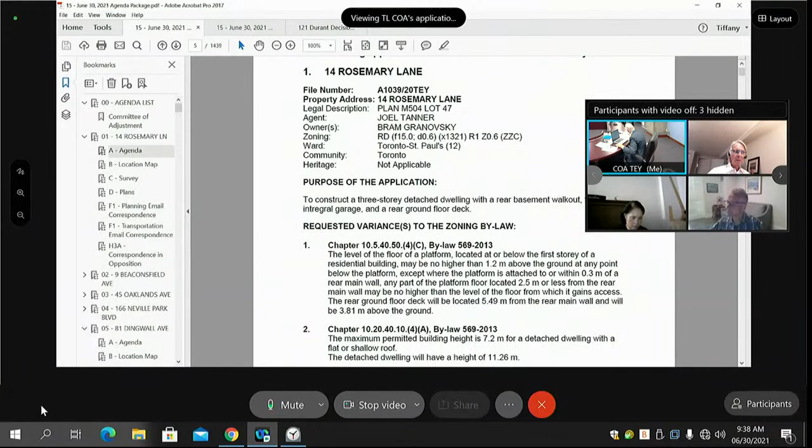14 Rosemary Lane. The purpose of this application is to construct a 3-story detached dwelling with a rear basement, integral garage, and a rear ground floor deck. On this application, we have material submitted by the applicant, email correspondence from planning and parking, transportation services, and correspondence in opposition from 14 Dewborn Avenue.

Mr. Tanner, are you online? Good day, Mr. Chair, members of the committee. Thank you so much. Can we have your name and your address, sir? This is Joel Tanner with the Office of SMPL Design Studio, 15 Colbourne Street, Hamilton, Ontario. So can you tell us what this is about?

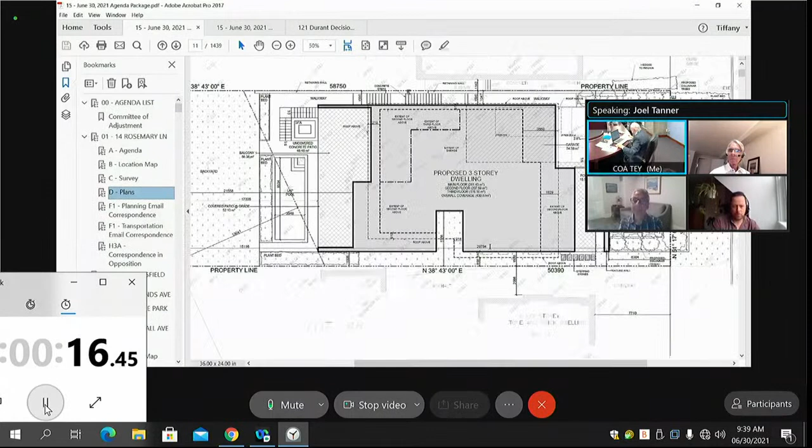Most definitely. So this application is for a single-family dwelling, with the listed variances at hand. We had a pretty good circulation. The current owners of the subject property made their rounds throughout the street to have discussions with neighbors. We have signed letters in support of the application, both at 11 as well as 15 Rosemary. We also have 18 Dewborn, who has signed. The direct neighbors at 12 and 16 gave verbal consent, but nothing in writing.

And as mentioned, the one neighbor contesting the application at 14 Dewborn is on the southern corner, tip corner of the subject property. We do have planning staff support. We feel that the application is minor in nature, driven by the fact that we are designing a modern dwelling. Modern dwellings, as we all know, are subject to deviated regulations from what a sloped roof application construction methodology would entail.

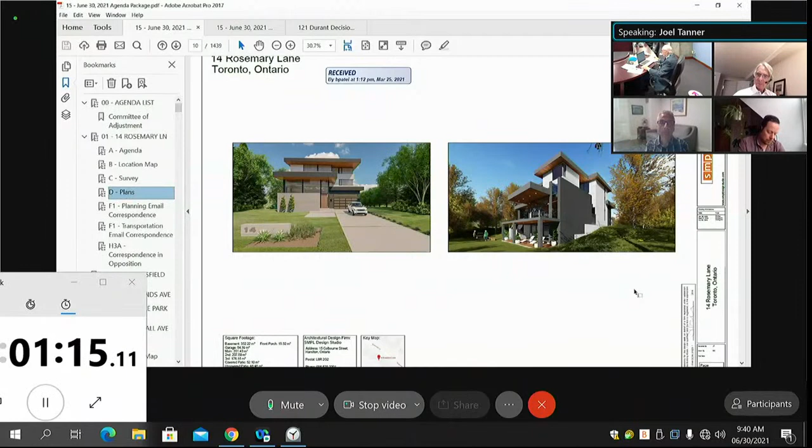That is the real driver in our application for the height deviation. When you look at the numbers from 7.2 to 11.26, that's a fairly substantial deviation. But I want to reinforce that the peak permitted allowable is 11 meters, so we are seeking 0.26 meters above and beyond the peak permitted allowance. I also want to note that we've designed the proposed new 3-story structure to be in keeping with the existing peak roof line of the existing structure on said property, so we are in keeping with the stature and magnitude of dwellings on the streetscape that exists today.

Also, within a peaked roof designed home, you are allowed 3 stories. It is when you get into a flat roof modern design concept where we have to deviate from the bylaw, because we are only allowed 2.

I just want to touch on one last thing within the list of variances with regards to the overall dwelling depth. The dwelling depth is measured depending on the bylaw we're studying - it is either the physical foundational structure of the build, or in the secondary bylaw, it also includes roof overhangs. Within the 569-2013 bylaw, we are allowed 19 meters. The house, as proposed, is 22.7, a 3.71 meter deviation. The rest of that deviation comes into play with the rear balcony. It's very important to us that we've introduced privacy for those direct neighbors, which is driving those deviations.

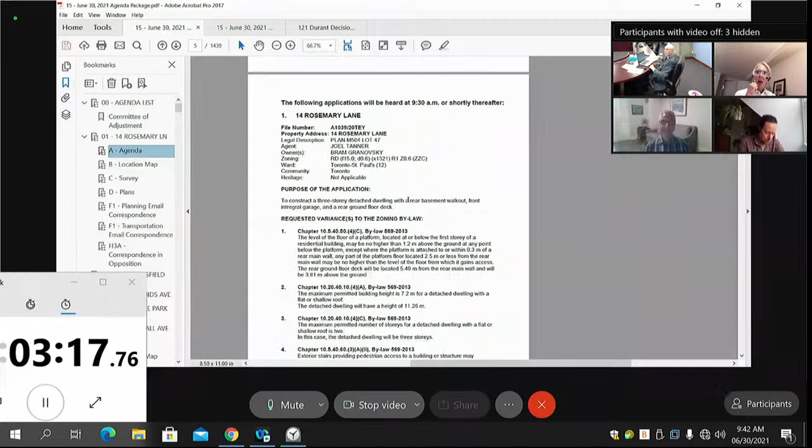Okay. Any questions, panel? Okay, can we move on to Mr. Gold, Mr. or Mrs. Gold?

Hello, Mr. Gold? Hi, Mr. or Mrs. Gold, can you hear us? You may need to be closer to the mic.

Hello? Can you hear me now? Not really. Okay, that's better. But you have an echo. If you're watching YouTube in the background, you have to turn it off. Is there still an echo? No, you seem to be okay now.

Could we have your name and address, please? Yeah, my name is Aoife Gold, and I'm at 14 Dewborn Avenue. Okay, can we have your comments, please?

Well, of the 13 variances, I'm only asking you to change two, the height and the depth. Taking away half of the backyard is major. They want to go to 13 meters from our back, not 24. It's also much higher than it's supposed to be. I don't want someone looking down from a balcony that close to our backyard, making me feel like I'm looking at an apartment building. I think that's what the zoning laws were exactly set up for, situations like this.

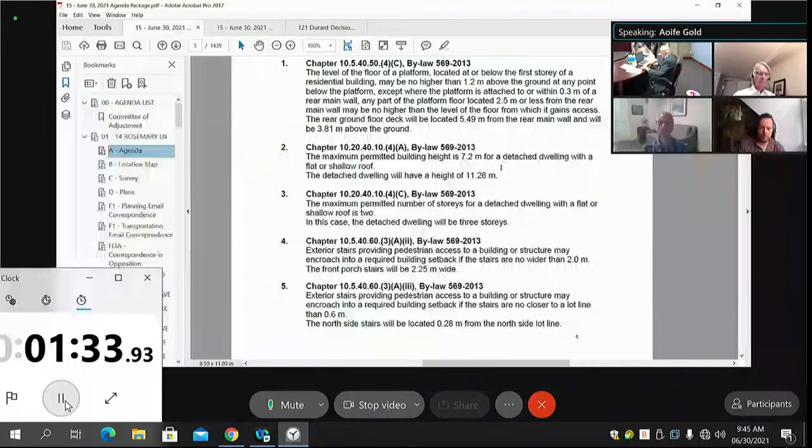Could you point us to the particular variances you're talking about? The height, okay, yeah, I will. Let me just get it. I've never done this before. Number 2, the height, right? My major one is the depth. It's 1.5 times longer than it's supposed to be. I don't call that minor, and they're taking exactly half of what's supposed to be the backyard away.

All right, so I don't know what Mr. Gold, the fellow before me, said. Mr. Gold, which variance is that? That variance would be number 7. Oh wait, let me get the variances, I have to look them up. Chapter 11. I'm just looking for it. 7 and 10 is a depth and a length. Yeah, it's the depth and the length that are my big concern.

All right, so the depth is at maximum, variance number 7. Is that the one you're concerned about? 28.45 meters, that's the one I'm very concerned about. Is there another one with respect to length? Yes, length is number 10. But I just mentioned one. Number 10 is 29.78. Yes, and number 7 is at 28.45, that's 50% more than what's allowed. And number 10 is the building length.

Do you have any other concerns, Mr. Gold? I would accept everything, I just think it's way too long and way too high. I don't want a big building completely covering the backyard right beside me. I think, just to say the last thing, those two proposals are not anywhere near minor, and I'm really concerned. It's half the backyard, it's a few feet or a few meters maybe, but not half the backyard, not 13 meters longer, and not that much higher.

You increased it by another almost 10 meters, 9.45. And I thought that is a big increase, not small.

Yeah, so the overall dwelling depth, item number 7, the permitted depth is 19. We're sitting at 28.45. The actual physical structure of the house is sitting at around 22.7. And when you include the measurement of the rear yard balcony - if you take the rear yard balcony of 3.66 out of the equation - that brings us down closer to about 25 meters, shy of 25 meters, in terms of overall building depth.

And then that 2.7 meter courtyard would bring it down closer to that 22 meters. So it's a bit of a culmination of all elements of the equation, and that's obviously directly linked to item number...

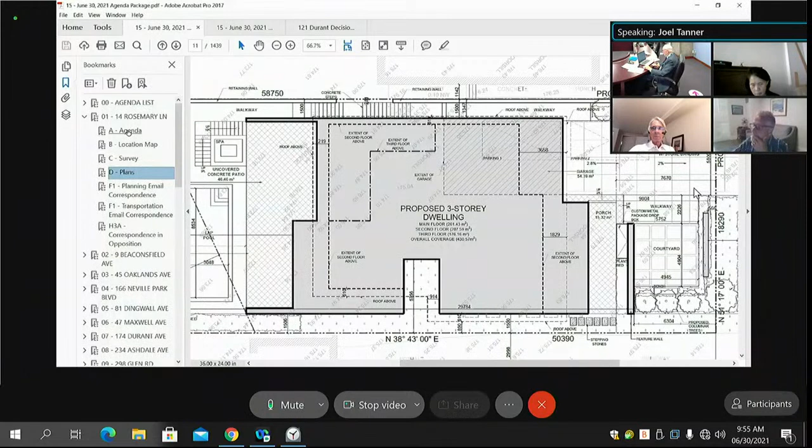Item number 10 - the calculation methodology of 569-2013 in terms of building length is inclusive of roof overhang structures. In a modern dwelling, we tend to design with a larger roof canopy to increase the overall architectural aesthetic of the home, and that's what's driving that overall building length measurement - the roof overhangs in combination with the balcony being covered.

One final item: we have a front feature wall, an architectural concrete feature wall that's 6 or 7 feet tall, shown on the cover page, sitting just in front of the window wall. That's where there's a 3 meter measurement, which is included in the overall length of the building, creating the tolerances: the 3 meter at the front, the 3.66 balcony at the rear, and the 2.75 courtyard in the middle.

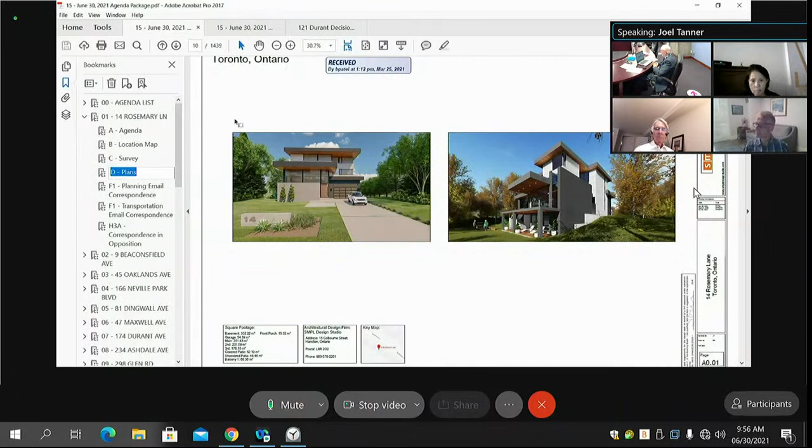One thing that hasn't been mentioned yet, Mr. Tanner, is how does this modern house fit in with the character of the street? I did a Google Street View, and there's no house that looks like this on that street. There's a house currently finishing construction on the opposite side of the street, kitty corner to us, a very clean line modern home that's been under construction for about 3 years, if I'm not mistaken it's number 9. Yeah, I saw that construction. I have no idea what that house will look like.

Very similar in nature and stature and massing to our building, very clean line, modern. Again, I guess we're not here to necessarily examine architectural styling, we're here to examine the variances. We feel that whether it's a flat roof or a slope roof structure, the slope roof is allowed to go up to 11 meters, and we're sitting just over that at 11.26. Modern design aesthetic is happening all over the city, and on this street in particular. We feel it's in accordance with what's happening on the streetscape.

Well, one house doesn't make it in accordance with the streetscape. All right, anyways, any questions, panel? Carl?

Could we look at side elevation 001? Sorry, side elevation 001 - that's how it's labeled on the drawings that were given to us. Yep, so that would be the northerly side.

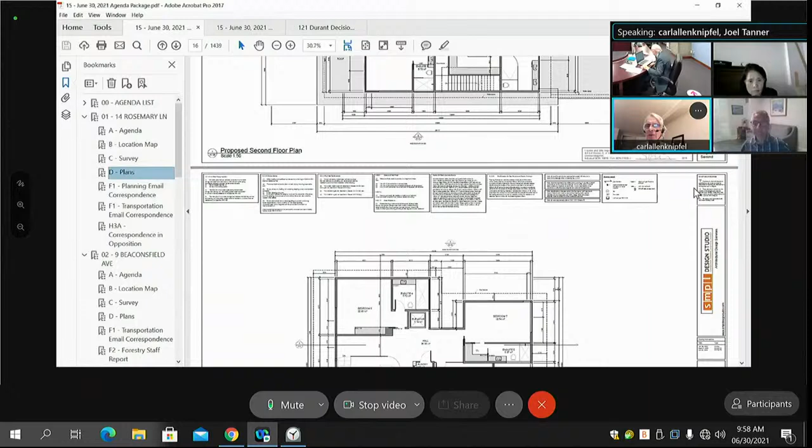Okay, you've been referring to the balcony as if it's a small appendage, but am I correct that the rectilinear space with the window in it, that's the balcony you're referring to? To Mr. Long's point - or Mr. Gold's point, I should say - it is a substantial building, it's not just a balcony. So I'm correct, that's what you're referring to as the balcony, right?

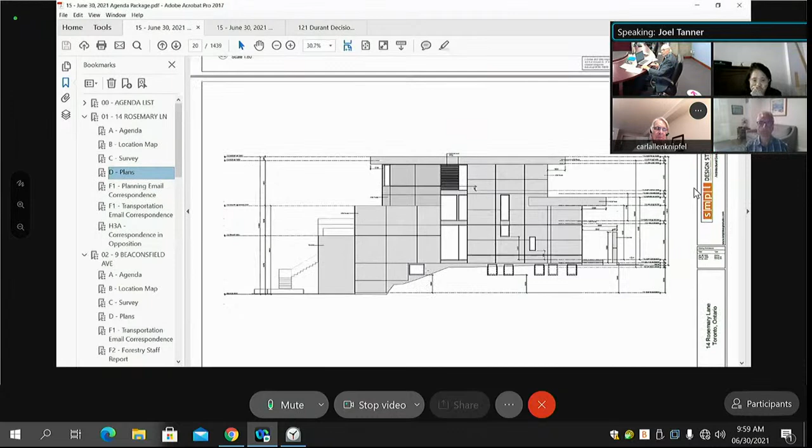Correct. So that projection of 4.585, the 0.457, and the 0.527, that in combination is the northerly side dimensions of that balcony structure. And that's a wing wall we've introduced into the elevation in order to introduce privacy for the direct neighbors, again driven off of that rear yard walkout balcony detail.

We've got, in our honest opinion, some pretty clean step back massing, which you're seeing from floor to floor to floor in order to gradiate that height. We're not looking to build a straight 3 or 4 story box. We've introduced some pretty strong architectural linear elements, and we've stepped back the building profile on both the front and rear elevation of the home to mitigate the impact on the overall streetscape as much as possible based on the magnitude of the development.

Okay, thank you. All right, panel, any further questions? Okay, we can now go into committee. Any comments?

Yes, Carl? Mr. Chairman, I think in isolation this is a very handsome building. It's extremely, as the applicant has said, extremely clean, and I think it's quite engaging. My problem is with it in this particular location, which is what we are charged with looking at - does it in fact enhance the location, or does it create problems for the neighbors or the neighborhood?

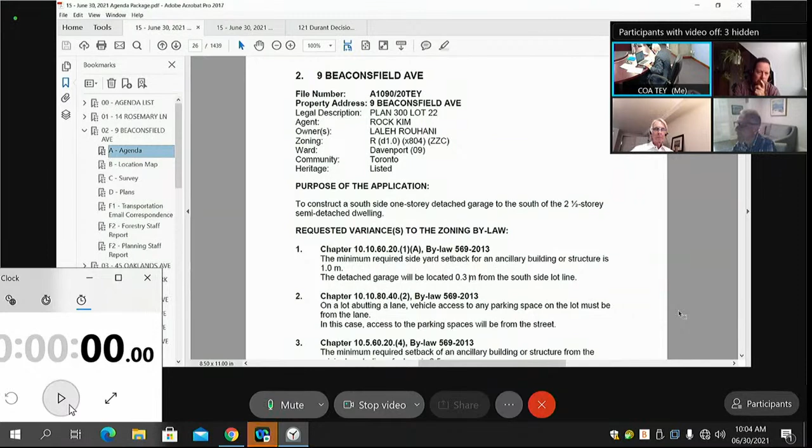Number 2, number 9, Beaconsfield. Purpose of this application is to construct a south side one-story detached garage to the south of the 2.5-story semi-detached dwelling. With this application, we have material submitted by the applicant, correspondence from traffic, transportation, and a report from planning and urban forestry.

Mr. Kim? Hi, my name is Rock Kim, yes, I'm on behalf of the owners, I'm the applicant. Actually, we already sent the email that the owner doesn't want to go forward with this committee, so we want to withdraw it. Are you asking for deferral, or are you asking to withdraw your application? Withdraw our application, yes, withdraw.

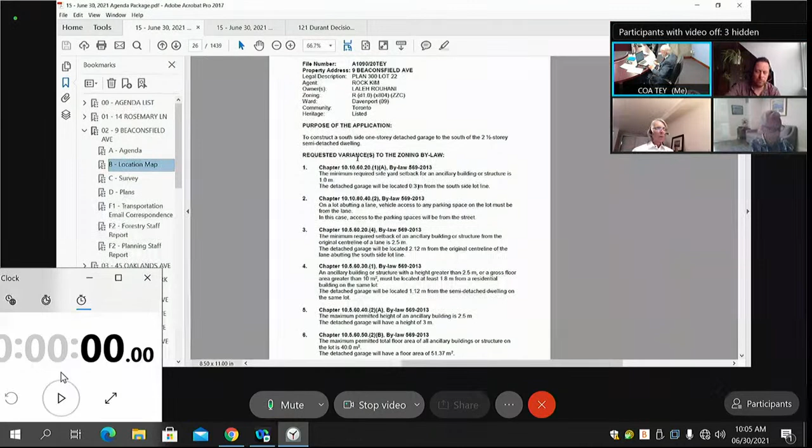Okay. Thank you, so we have some opposition. Ms. Frankel? Hello, can you hear me? Yes, we can. Did you hear Mr. Kim say that the owners want to withdraw their application? No, I didn't hear that. Was that just said just now? Yes, just now. So they're withdrawing their application for the variance, right? They're withdrawing their application, yes. Well, I'm in favor of that withdrawal.

I thought the application was misconceived, I thought it was intrusive architecturally and conceptually, so I think it's wise to withdraw it. All right, thank you, Ms. Frankel, I don't want to discuss the merits. Can we just get her address for the record? My address is 1088 Queen Street West, corner of Dovercourt. Thank you, all right.

Panel, do we have a motion with respect to withdrawal? Yes, Nimrod? Yeah, I'd move approval of the request to withdraw the application. All right, a seconder? And do we have to close the file on that then? Yeah, the motion will be to close the file. Peter, second. All right, all in favor of the withdrawal of the application and closing the file? All right, you have your request, Mr. Kim. The withdrawal is approved and the file is now closed. Thank you very much.

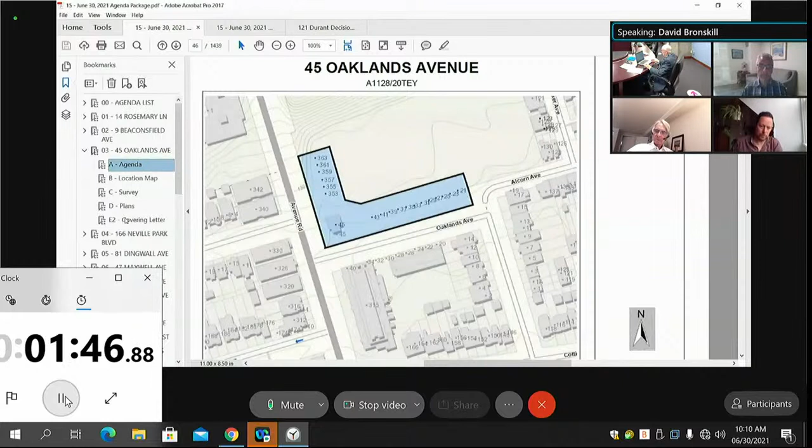Without this provision, in my respectful submissions, there would be potential issues such as stormwater management if the first floors of the buildings were actually below the elevation grade of the adjacent sidewalk. What's important for the committee is this is not a case of construction occurring in a manner that wasn't in accordance with what was previously approved. It's an error in the actual site-specific bylaw itself that we are correcting through this variance process. In short, the semi-detached dwellings as proposed, approved, and ultimately constructed are the same. It's just that this variance was not previously accounted for in the site-specific zoning.

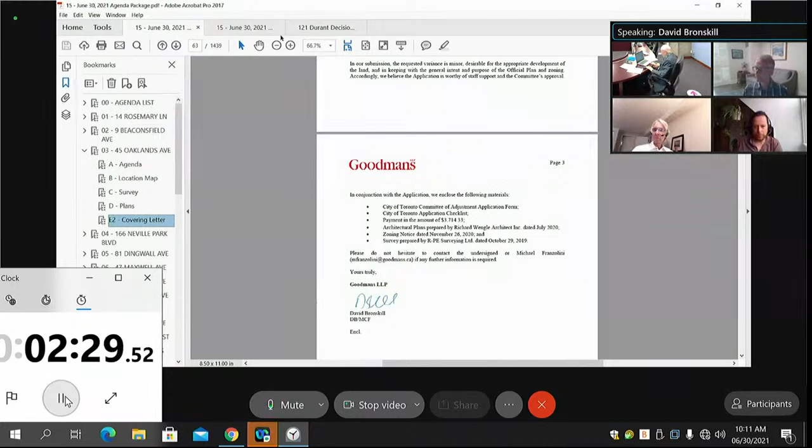I'm happy to answer any questions of clarification the committee may have. Panel, any questions?

All right, thank you. We'll go into committee now. We have a... Carl?

Mr. Chairman, I think this is a very straightforward application, and as Mr. Bronskill so clearly indicated, it appears very much a technical amendment. Clearly it makes sense to have the living quarters above the grade of the sidewalk. That was intended from the original design, and it was intended as well when the draft site-specific bylaw was created, it was just missed. So I have no difficulty at all in supporting this application without conditions, and I would so move.

All right, do we have a seconder? Yim, all in favor? You have your approval, sir. Thank you.

Number 4, 166 Neville Park Boulevard. The purpose of the application is to construct a 4-story detached house with an integral garage and front porch.

I need 2 mics. Oh, this one isn't so good? Oh, okay, all right.

And with this application we have material submitted by the applicant, email correspondence from Urban Forestry and Transportation Services, a report from the Conservation Authority and Urban Forestry, and opposition from 153 and 161 Neville Park Boulevard. Mr. Librach?

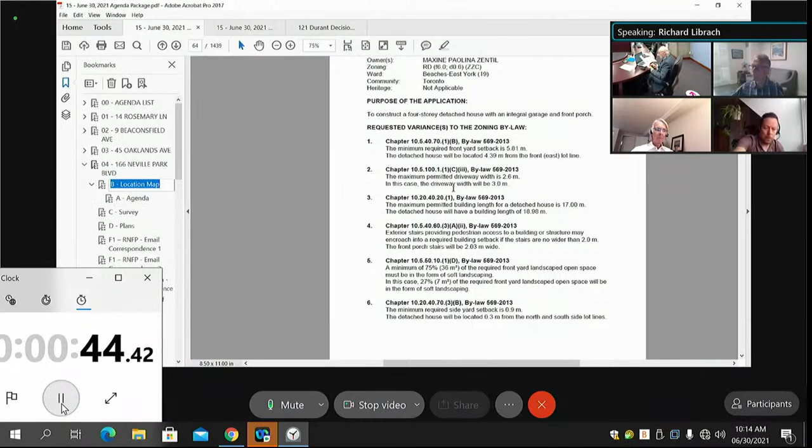You start moving up the street and you'll see house entrances located 3 stories above the street. On the other side of the street, you might see a 2-story house located a story above the street because of the geography. The essential design strategy for this proposal is a 2-story base home with a setback 3rd story over the garage level, similar to what's there today.

The strategy is thought to be in line with many examples of recent developments on the street, in particular the house immediately to the north that exists there today. The street front of the house is located midway between the house to the south and the north, so it's been relocated, moved a little bit further forward from where the house to be demolished is, and so on and so forth.

Much effort was spent working with the planning department, and they weren't going to be satisfied until the other authorities were satisfied. As such, there is no planning report that we're aware of that shows any objection to the proposal.

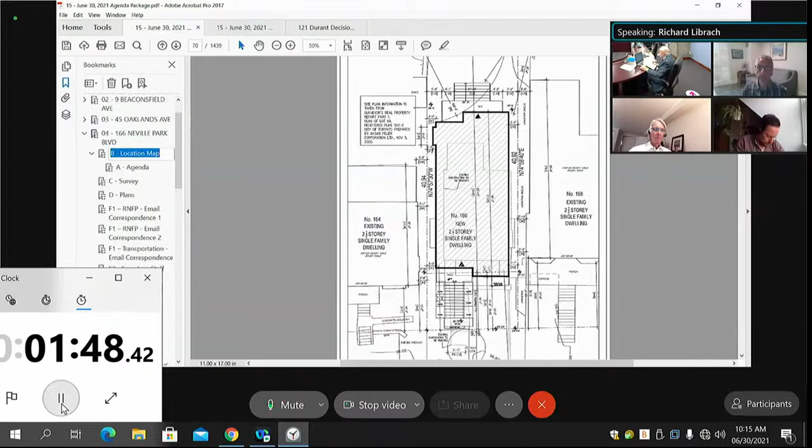In working with the various authorities, we have correspondence from the TRCA dated March 22nd showing no objection to the proposal through design changes made with them. Ravine and Natural Features Protection from Dan Hammerschlag on Feb 19, also no objection. Urban Forestry and Ravines, also no objection, that's Yuroslav. Finally, we conducted a Zoom meeting with the immediate neighbors on March 11 to describe the proposal and answer any questions.

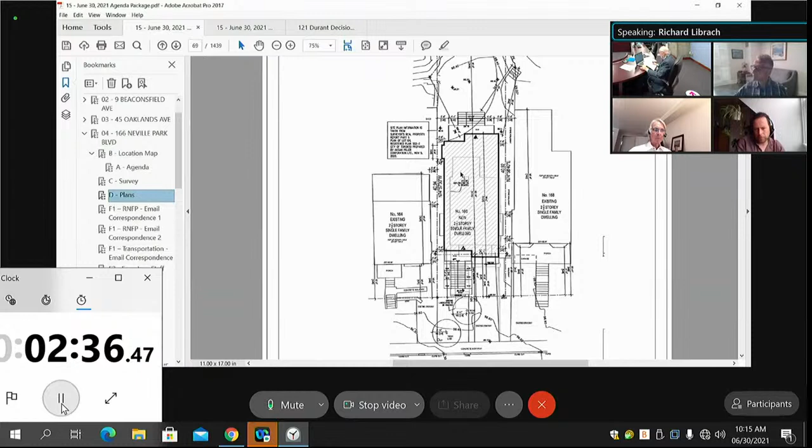At the time, their concerns were primarily water-based, because of the geography and the convergence of the water flow. The land this house is proposed on will need significant water abatement addressed. It's not part of this committee of adjustment hearing, but we're aware we'll need underground water devices to carry water to the street. We're also aware there were letters of objection from a couple of neighbors on the other side and down the street.

I'd like to address the concerns of our neighbors immediately to the north and south who came in yesterday to the committee. Their concern was expressed again about water and also the side yard setbacks. I want to say this before any questions are put forward, which I'd be happy to address regarding any of the variances.

We no longer require variance 4 or variance 6, and variance 6 addresses the side yard setback. We are going to remain at the permitted setback of 0.9 and no longer require that setback. That was really for bay windows located on the second floor, which had nothing to do with water or access to the rear, but we decided to remove that variance. So we no longer require 4 and 6.

If the committee would like to ask any particular questions about the variances, I'm pleased to answer them. Just one thing that probably stands out: the proposal is not a 4-story house, but it is technically defined that way because of the location of the first floor being at the garage level. So the gross floor area proposed in the basement is included and magnifies the density number as well. But it is a 3-story house over the garage level at grade.

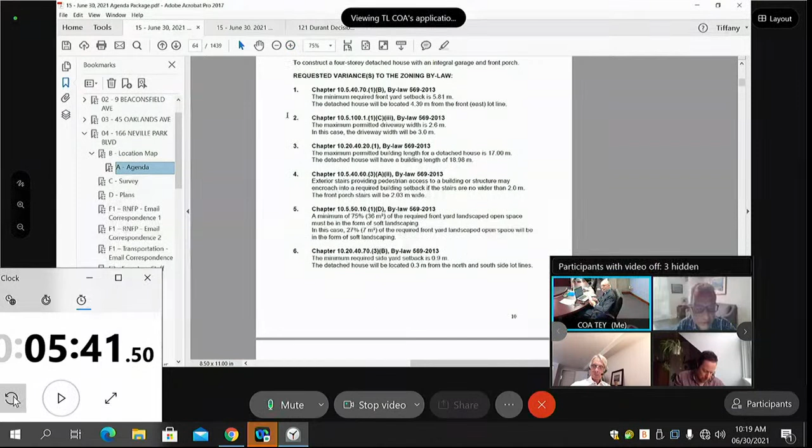The first is, can the applicant explain what is on the roof of the building? Yeah, of course. The design of the roof is really a clerestory window. It's not a habitable space. The height of the proposal is measured to the top of the roof of that clerestory window. The window feature itself is not visible from the sides or the street whatsoever. The actual height of the top of the roof is 11.31 meters.

That's 109.7 geodetic. The neighbor to the north is currently at 109.6 geodetic. So the top of the roof, not the feature you see above it, which is centered and set back - the side elevation would describe its position relative to the front elevation - it's really not a visible element, but it is a clerestory window facing to the back.

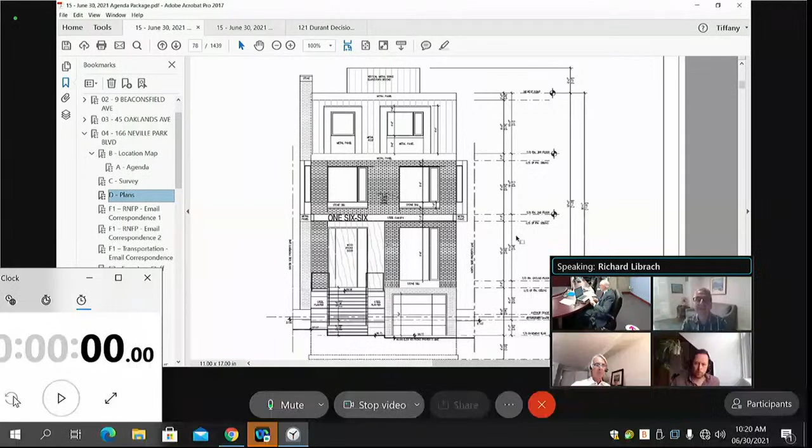And so why does it have to be that high? Could it be lower and still covered in, I'm assuming it's glass to let light come through? It could be. The idea here is to use a window rather than a skylight. Could the technician please move the drawings down to the side elevation?

Hold on, that's the back. If you wouldn't mind just stopping there for a moment. So you can see there is a window facing the ravine. It's not a view, it's to bring natural light in through a window, not a skylight. And it's very shaded back there, there's a lot of trees. The ravine goes up, it's a reverse ravine, so it's quite shaded all in that backyard, but you would not get direct sun through that clerestory.

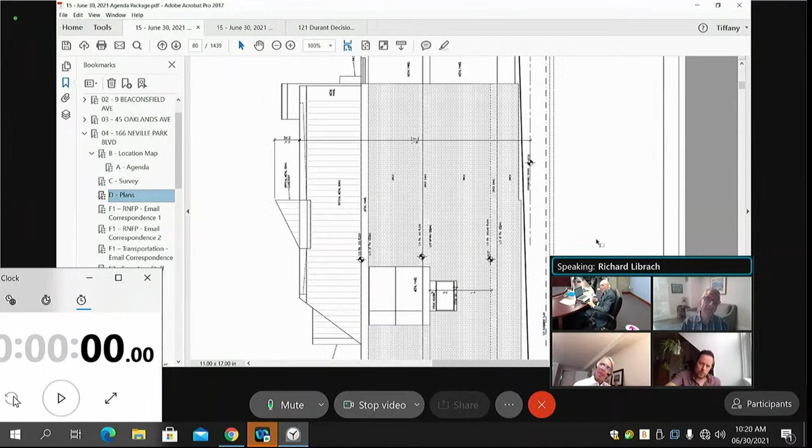If you move to the side elevations, please. Although it's sideways here, I don't know if you can turn the drawing, but you can see how far back it is set from the front and rear elevations. So it is not something that you can see whatsoever.

However, the zoning approach here measures to the top of that element. In fact, the top of the roof is at 11 meters, where you have the top of the third floor.

Great, thank you. And the other two questions, one related to the FSI, if you can just explain what is triggering such a large increase. And yes, then absolutely. The other question relates to the soft landscaping in the front yard. Yeah, absolutely.

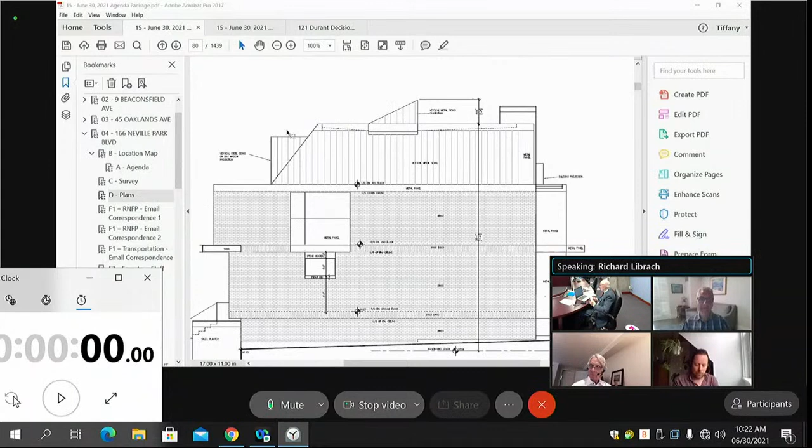The determination of first floor in this case is the garage level. So if you look at the basement plan, ordinarily you would not include a basement in the GFA on a typical flat site and so on. But if you look at the basement, that's correct - there's a garage and some storage, and then all of the area exclusive of the garage is included in that number. So the actual number is 0.9 for the home, but it has been increased because the calculation here includes the basement floor space as well.

And then your other question was about the landscaping. Quite frankly, I don't really understand how that number was arrived at, because when I measure it, it doesn't really make sense to me. The landscaping actually, when you measure it, and I checked it, is actually 66%. The examiner did not include the area of the planters flanking the front entrance stair for some reason. And I think we maintained the driveway that is currently there, we're not touching that. So combined together, the soft landscaping admittedly is low, but that's just how the examiner decided to calculate it.

Thank you. So, Mr. Librach, with respect to the soft front landscaping, is the soft landscaping compromised by the number of stairs needed to get to the front door?

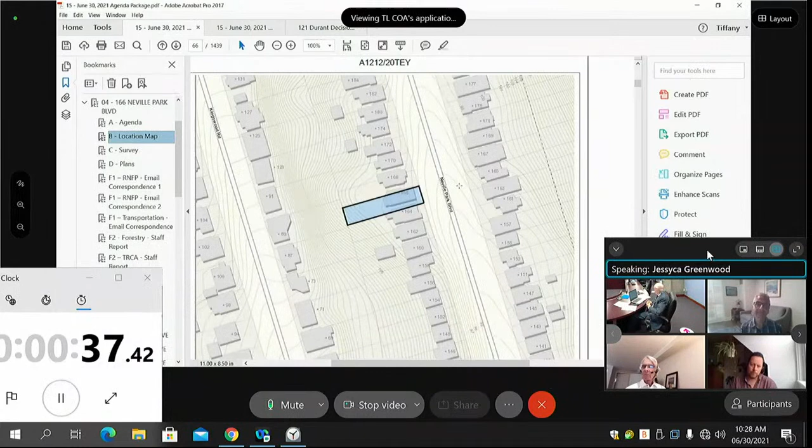And Mr. Librach is correct, we did have a discussion on March 11th, and we learned a lot about what the plans are, but I do still think both Ms. Chown, who's at 164 Neville Park, and my neighbor, we have concerns about the size. We're glad to hear this morning that variance number 6, the side setback, has been abandoned, because that really does impede our ability to access our backyards if the sides of the house are constructed in such a way that the houses are so close together.

And we feel that that's not consistent with the character and nature of our street and the way that these single-family dwellings look on our street. So overall, we're happy that the dilapidated house is going to be replaced, and we support that, but we're concerned about the size and the magnitude and how that will impact our properties.

And as you've heard, there are significant water concerns, and we haven't really heard about how that's going to be dealt with in a way that gives us comfort. Those are our concerns, Ms. Greenwood. I wouldn't say that we are opposed to all of the variances, that's not the case, but we want it to be appropriate and consistent with the rest of the street.

So just to reiterate, both Ms. Chown and I have fairly classic style homes, and this is going to be a very modern style home. There are other modern homes up the street, but the adjacent two houses are fairly classic styles.

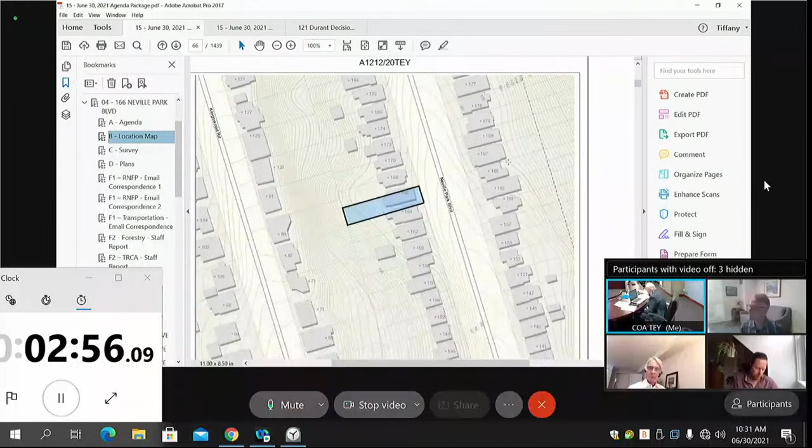So you gave us a vague response, aside from variance number 6, which is now removed, I wasn't sure what it was you were objecting to. If you could point us to a particular variance that you think is objectionable, or is it just that you feel this house is a little too large, and not in keeping with your house and Ms. Chown's house?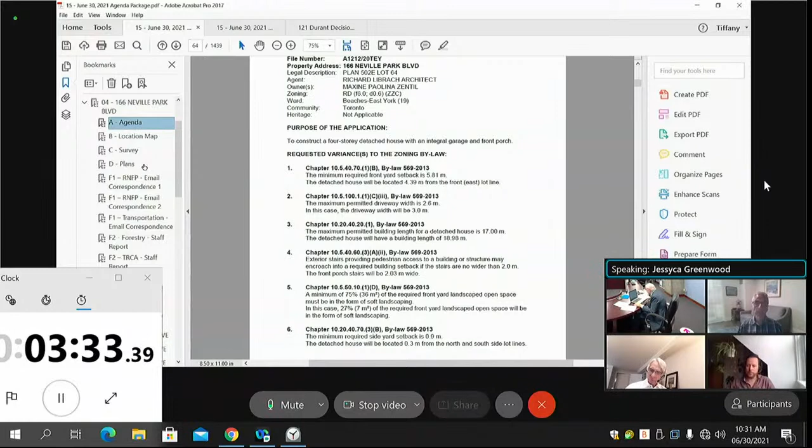Yes, I would say it's the latter overall. I mean, in terms of the use of the side areas and how we access our backyards, in terms of the elevation and how that... I'm looking at the requested zoning for what section that was in terms of the elevation and how the sides of the house would be crafted.

But I agree with you, Mr. Chair, it's the latter. Okay, thank you very much. Unless the panel has any questions of Ms. Greenwood? No? Okay. Thank you, Ms. Greenwood. We'll go back to Mr. Librach. Do you have any comments to make with regard?

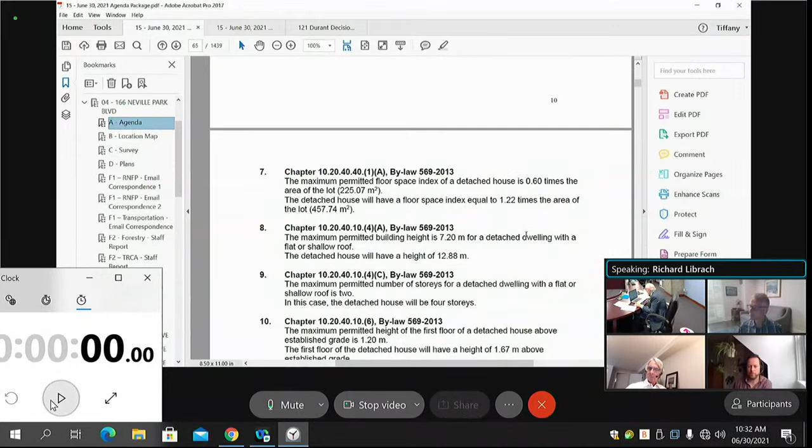Yeah, I would be happy to make them. I just wanted to be clear. The setback requested was on the second level, was never meant to impede access to the back whatsoever, but it's now no longer there at all. So could I please see the site plan just so I can clarify, because the location map was not up to date and accurate.

Yeah, that is the condition that we're talking about. So those projections that you see towards the front on the sides are no longer going to be needed with the removal of variance 6.

And then once again, I reiterate, what's likely going to happen here is, with an understanding of the water issues and some more recent testing that's been done, if you could just skip to the basement level, please. It is unlikely that my client is going to build a basement here at all, except for the garage and entry. So stop there. I can't touch the screen, but everything beyond the stairs will not likely be constructed, just because there are these water issues.

And so really it is intended that the garage, the storage and so on, laundry, and just everything up to access the stairs to get up to the first floor will remain. And so I can't tell you exactly what it's going to be, but I can tell you that the area above the ground, not in the basement, is 0.9. And all of the other, which takes us up to 1.22, is coming from the basement square footage, which is going to be reduced considerably with the elimination of that rec room.

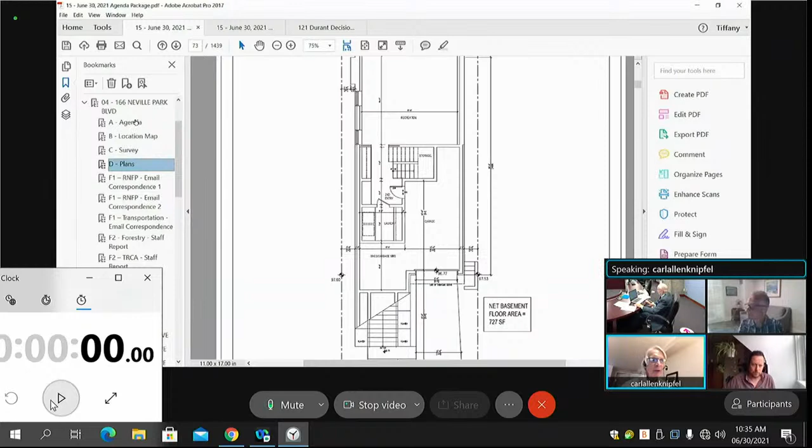I, for one, would be pleased to, if you were to amend your variance number 7 to be a number that doesn't include the portion of or that includes what you're going to build, and then doesn't include the section of the basement that you're anticipating not building. I think that would be a fair change to give the adjacent owners some sense of comfort about the discussions you've had.

Because I don't know the math exactly, I would be comfortable saying 1.1 or 1, maybe let's call it 1.1. I don't know the exact area that won't be built, but I can only say that number comes from an additional 0.32 times the area because of the addition of all of that basement area, so I would say 1.1 times area would be the revised floor space index.

And what would be the square meters then? Let's see, 1 times the lot area, I think. So the lot area is...

So are you dropping the basement? Well, we're, who's asking that question? It's Barbara Bardisic, the Deputy Secretary Treasurer. We're not dropping the basement.

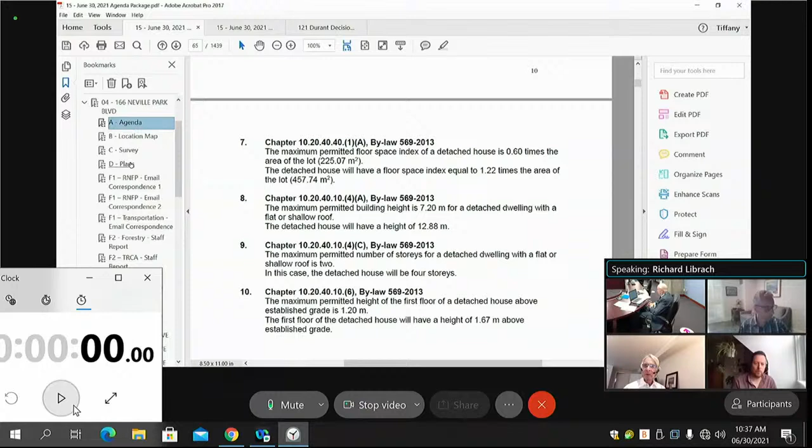We intend to eliminate the area west of the stair. So all of that back area would not be required and probably not desired because of the water. We want the owner to have an entrance from the garage into the house that will allow them to walk up in the winter internally. So that's the justification to keep the stair and access to it.

So the idea would be to eliminate the recreation room. I could do a calculation. If you zoom in, I could look at it, but the new gross floor area would be 414 square meters.

So 1.1 times the area and the figure, can I help? I got the equivalent to 412.71 square meters. That's 1.1. Yeah, I would, that's fine. 412.7 meters would be the proposed gross floor area.

Any further questions? Thank you. So just to clarify, Mr. Chairman, then the applicant is amending variance number 7 to a lesser amount, the numbers we just discussed. Is that correct? That's my understanding, Mr. Librach. That is correct. And just in the future, you shouldn't be making any revisions in your rebuttal. They should be made off the top when you're presenting your application.

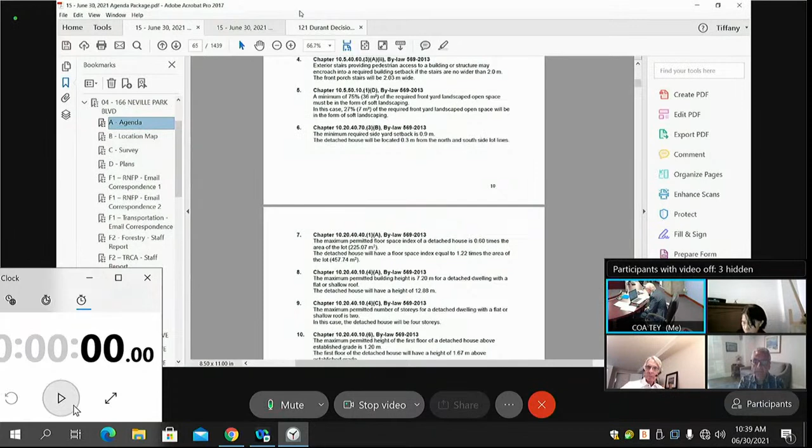Okay, let's now move in. Let me just go back to Miss Greenwood just for a moment. Miss Greenwood? Yes, Mr. Chair, I'm here. So you've heard the discussion about reducing the basement to 1.1, 412.71 square meters. Yes, sir. So that's okay with you? Yes, I guess what I would say is I defer to the committee on assessing the remainder of the variances, I don't have that expertise. I'm content with that amendment.

Well, I think Mr. Librach explained that would assist the owner with dealing with the water problem. Right, if he built more basement, he would have more problems with water. So I think this addresses some of your concern, I think. Yes. Okay, thank you very much, panel.

Do we have any comments, or do we have a motion? Yim? Yes, just one question, I want to ask the applicant, they are still subject to TRCA permit, right? That is correct, yes. They don't have concerns with the proposal, but yes, we'd still have to obtain the permit. Okay, thank you.

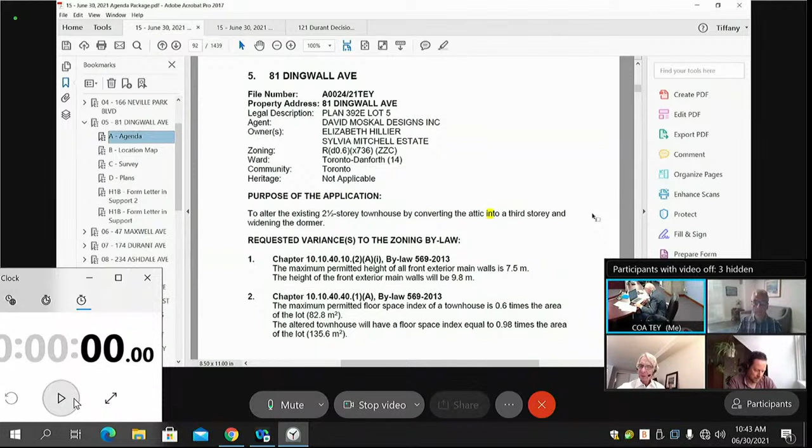Okay, I'm not sure we need a presentation, panel. Do we need a presentation in this matter? No, I don't. Is there anything you want to say before we take it into committee? Just that we do have adjacent homeowners, letters of support, 7 letters of support in the neighborhood, and this is not really altering anything with the front scape of the existing dwelling, just adding another room upstairs. The reason for the variance is that the existing FSI as built is already over, so any new FSI will trigger a variance.

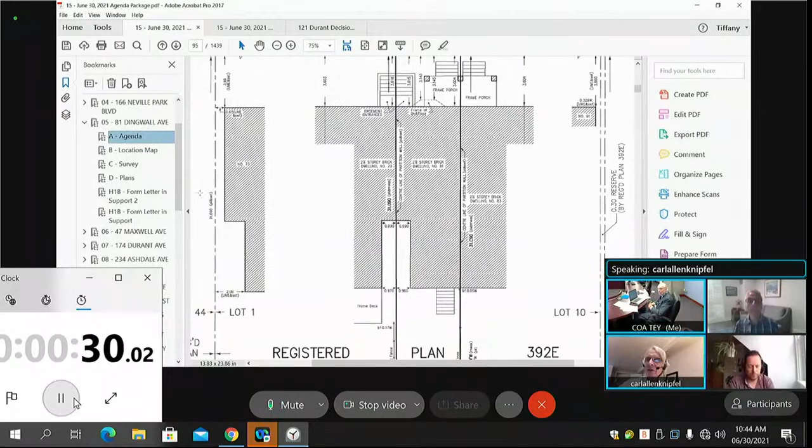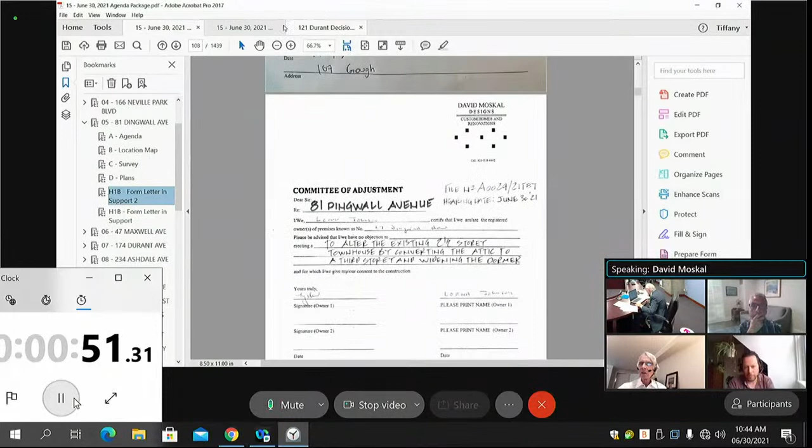Thank you, sir. Are the support letters, do they include number 79? If I read your drawings correctly, that's the one that's most impacted. That's correct. Now, that is owned by David and Sue Thatcher, who are the executors of Sylvia Mitchell's estate, who own 81 Dingwall. So the owners at 79 are David and Susan, and they are the adjacent neighbors, but they also are the executors of Sylvia Mitchell, who has passed away. And that's at 79. Correct, yes. And we have all the legal documentation of that. Thank you.

Okay, any comments, or do we have a motion? Peter? Yeah, I'm happy to bring a motion for approval. I think this is a very straightforward application that's just adding some living space within the attic and expanding the dormer, so I can see no negative impacts on the neighbors or the neighborhood. So I move to approve with no conditions. Okay, we have a seconder. Carl, are you seconding? Yes, Carl, I was seconding it, Mr. Chairman. Okay, thank you. All in favor? You have your approval, sir. Thank you very much.

Number 6, 47 Maxwell Avenue. The purpose of this application is to alter the existing two-story detached dwelling by constructing a two-story rear addition, a front porch, and a rear deck.

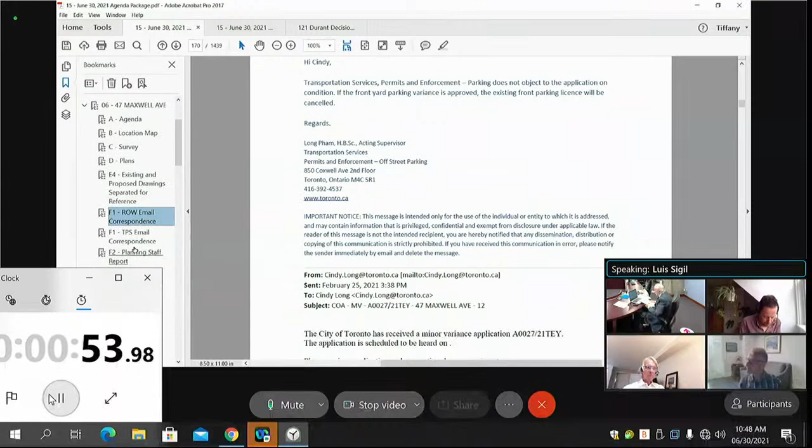So we try not to disturb the existing conditions. If you have access to a Google Map view, there is a mature tree on the south front side of the lot that expands and goes through that entire parking space and the existing front yard landscaping. So the idea is not to touch anything on the front yard. Whatever you see there, it's existing condition and to remain.

The only minor change on the front is that the stairs currently on the north side coming towards the driveway, now we're going to switch it around. So we're going to take the stairs out from over the tree roots, to try to do a betterment in terms of protecting the tree.

In terms of the mass of the building, we are asking for 0.86 times, or let's say 86% coverage. It's fairly consistent with the neighborhood, although only 60% is allowed. But the committee has previously approved close to 100% for this area, so we are not asking anything above normal.

And there is this side yard setback that we should be respecting, 0.45 meters, but in fact we are pretty much at zero. There are a few houses in the neighborhood, if you go along it you'll see number 11, number 13. Pretty much they are touching eaves, they are pretty much on a zero lot set line.

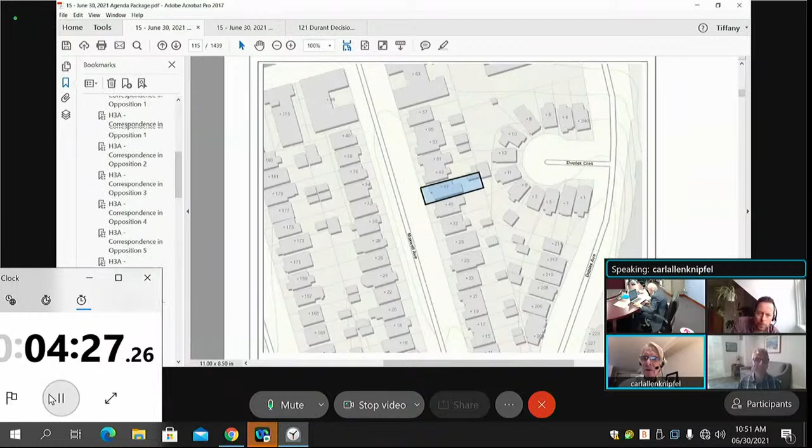Did I understand the applicant, did you say the planning department didn't raise any concerns? Because I have a report where they are actually concerned. Did I understand your comment correctly?

The only concern that planning brought forward, which we discussed over the phone, is they didn't like the bump out, the stand out. But the only report I have is that they are against variance number 1 and variance number 4, which is the parking.

But just so you know, they are recommending variance number 1 not be approved, and recommending that the front parking space be redesigned so it's perpendicular to the front lot line rather than parallel. So are you aware of the recommendations?

I am, and that's exactly what I was trying to say. This variance for the landscaping and the parking is an existing condition.

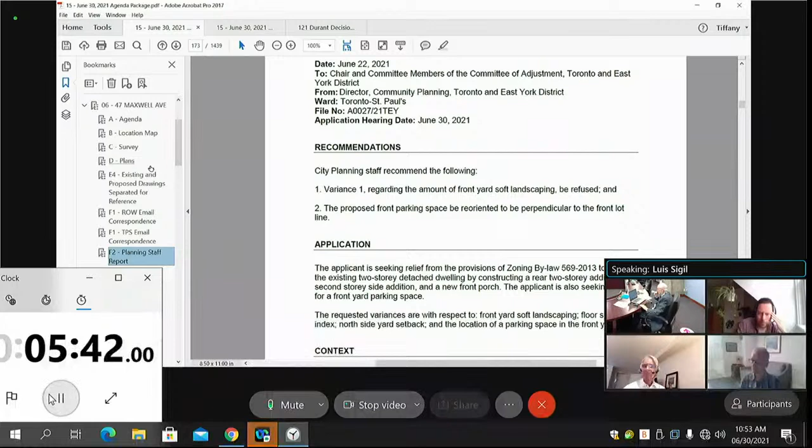So if I try to satisfy their recommendations by flipping the parking around, I'll start to run into issues with transportation because we have to apply again and show new plans. But our biggest problem is with forestry, because if we turn the parking around, we're going to encroach into the mature tree and destroy more of what's existing, even on city property.

So the landscaping at the end, if we turn around the parking, which I understand was what planning intended to ask, we'll have to sacrifice the landscaping, and probably the tree. This is a mature tree, and because of this construction, you have to be at 4.8 meters TPZ, so we'd encroach into this tree root area.

Again, I rather keep the existing conditions, everything as is. And if you have access, if you saw the street or the next adjacent neighbor, there is exactly the same parking, it's mimicked, like a mirror. Number 45.

The other option you didn't respond to is having variance number 4 refused, which would not give you any parking in the front yard, which would save the tree and would also not be in conflict with what the planning department is recommending.

Correct, that would be an option, to take the parking completely. But again, the purpose is to have the parking and maintain the existing condition, because this is an existing condition, there is an existing license, an existing agreement, so we just keep everything as is.

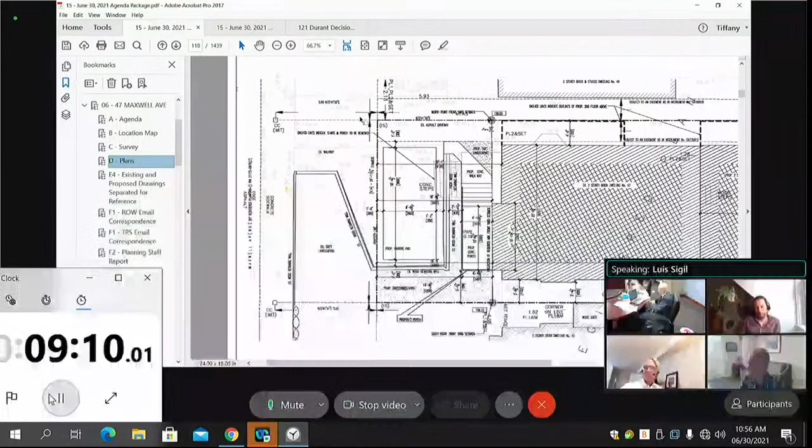The existing parking has been there for many years, and they're actually permeable pavers. Anytime you try to do any driveway or front yard replacement, from my knowledge with arborists, you have to create plans and mitigation strategies to not disturb the roots. So in a sense we can go that route, but it will create so much disturbance that my fear is forestry will never approve it.

So this is about a 60-foot tree, a mature, big, huge tree. The canopy on the north side covers the entire house, comes pretty much to the property line. As a rule of thumb, the roots reach pretty much where the base of the canopy reaches, the arch. So again, it's a double-edged sword here: if we don't touch anything, everything stays as is, and the tree keeps going the way it is.

If we try to do something, which to me I don't mind, it will go into some route that probably will never get done, and we'll get even stronger opposition. They'll say, why touch an existing condition that is suitable and working for everybody?

I just need to point out that you mentioned you have an existing license, but off-street parking's email says they're okay with the application—if this variance is approved, your front yard parking license will be canceled.

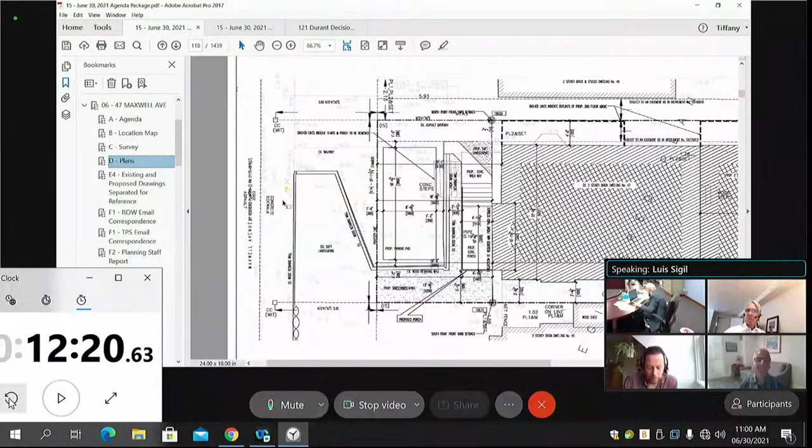Yes, I'm okay because we might lose the license, but we still keep the spot. If you approve the application as is, we'll be fully satisfied because we'll keep our parking space parallel to the house, within our property limits. Yes, we'll be okay. If that's the situation, we will move forward. Okay, all right, thank you.

Any further questions, panel? Okay, let's move on to Grace Lee, Wilson Lamb.

Yes, I am Wilson Lamb, the owner of 55 Maxwell. Just a voice check, is my voice okay? Yes. Okay, thank you.

I'm responding to the objection of this application based on the criteria on page 2 of the notice, which says the role of the Committee of Adjustment is to provide flexibility in dealing with minor adjustments to zoning bylaw requirements. To approve such variances, the committee must be satisfied of the four bullet criteria. I'm going to raise each bullet in turn as the reason why I object.

Number one, the variance requested is minor. It is not—based on the variance listed, this is a major variance. For instance, the first one, Chapter 10.5.50.10.1.d, regarding the front yard landscape open space in the form of soft landscaping. I calculate the variance represents 21% lesser area than required. So in terms of 21% lesser area, what is the criteria for a minor variance?

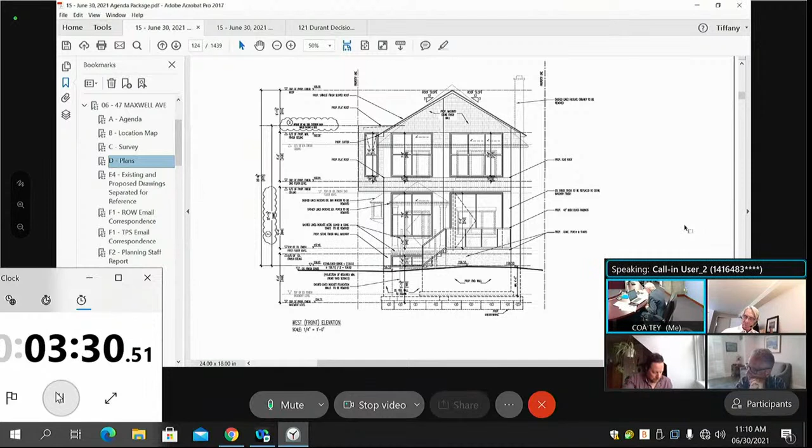Okay, well, then I'll go on to the concept of neighborhoods in the official plan. I don't feel that this property respects that. It says it should respect the existing physical character of buildings, the streetscapes, and open space patterns in the area. It doesn't respect the existing physical character of the area. It's too large for the 30-foot lot upon which it sits. It's unattractive. I feel it's totally inappropriate for the area.

And as far as the extension in the back, it is about a third longer than any other extension in the area, and I believe it's 43% more... something. Wait a second now, I've got many notes, but I'm getting a little confused here. It has 43% more space.

Sorry, I'm just looking for something else. And also it will overshadow part of my rear garden. There's a balcony proposed for the second story, which will interfere with my privacy. It's oversized and turns the whole property into a fortress.

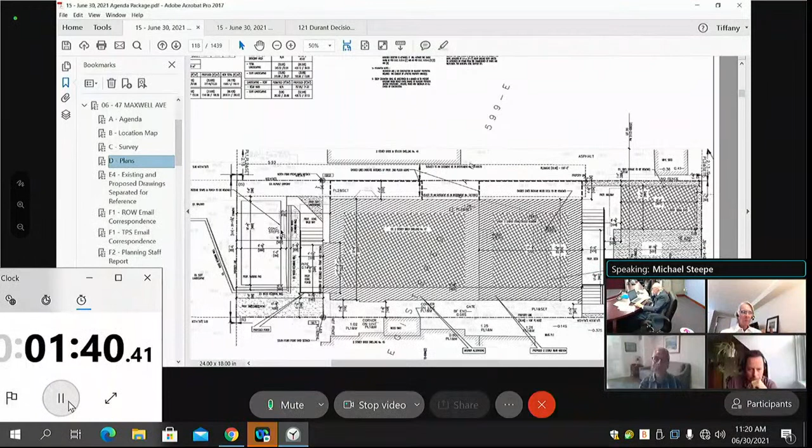The slope of the roof is also sloped downwards towards us. It's a 4-pitch roof, whatever you might call that. So when I'm referring to slope of the roof, I'm speaking of it from west to east as it slopes downwards, as it moves east to us. And so it's much less ominous. But I think generally, when I look at the whole proposed plan, there's a complete lack of any consideration for the neighbors, including myself, wholesale here.

So the fence that separates us, which is a slotted cedar fence, was partially paid for by the owner of the house when he lived there prior to the new people last year coming in, and the neighbor to the south and the neighbor to the east.

So it's one continuous fence. And we all got together, and there's been some dialogue, we talked to our neighbors. And again, this variance seems to just throw all that out the window.

The reason I bring it up is I think at the beginning, Mr. Bruno made some suggestion that maybe there's some dialogue with neighbors. I just want to be clear that my wife and I received none. We're also sorry we didn't submit a written submission. I'm timing, it's my fault, I didn't get it in, I didn't realize the timing exactly. But by no means does that indicate how strenuously we object to what is taking place here.

So then specifically, as I look at my notes to make sure I'm covering my points: if you allow the variance to take place, the enjoyment of our backyard will be potentially greatly impacted. If the amount of activity we've noticed has increased with the new owners continues, pushing that activity closer to the eastern side of the fence, with a balcony, with access to the basement that would be new, with a smaller yard area, would appear to even allow for more activity in the backyard and more invasion of privacy to our backyard.

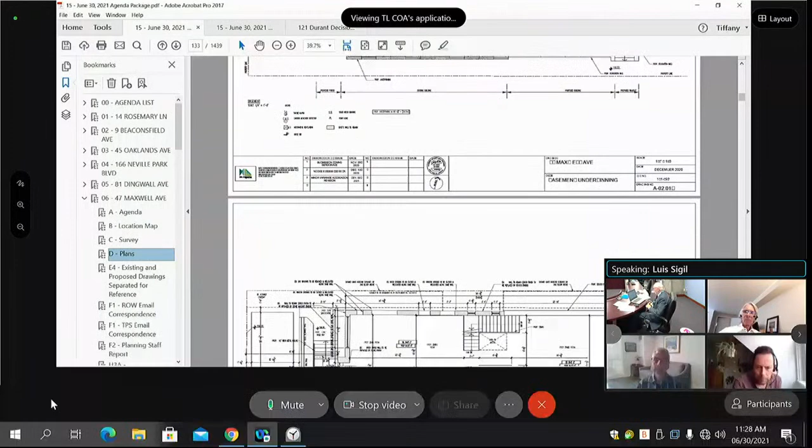No, but variance number 3 talks about the building being located 0 meters from the north side lot line. Yes, that's correct, Mr. Chair - that's exactly the bump outs. They're going to be very close to the 0 lot setback line. So the bump out is what's causing this 0 meter? Correct, correct. It's the bump out that is triggering this variance.

Only the bump outs - is that the bump out on the second floor, or another one? No, it's just the second floor. So even though it's on the second floor, it's considered when talking about the lot line? Yes, correct. According to zoning, it's the closest part of the facade that counts into this setback. I'd say about 60 to 70% of the house - if we do the math on that side, according to the bylaw, it's just a portion on the second floor, maybe tops 40%, that is actually encroaching and creating this variance.

Just one more topic, because the next door neighbor was concerned about fire access, so just to be clear that this is allowed. This is part of the next phase, which is the building permit drawings. We have to be compliant with fire code - we have to protect the house and the neighbor with fire-rated walls. We don't have windows on that particular facade. So we are compliant with everything, with the exception that the particular bylaw existing for this area doesn't allow the zero lot setback line.

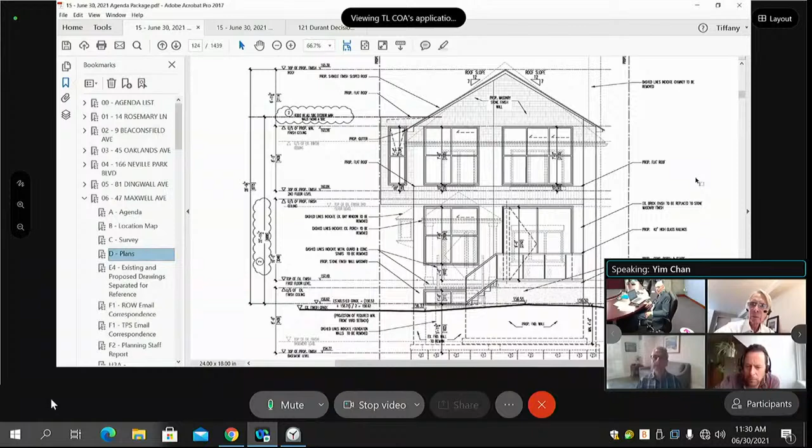Panel, do you have any questions of this witness? Carl? Yes, I do have a question. I know you've been working with the building department - I just want you to reiterate that these 4 variances actually went through zoning review, right? Because on the application I did not see a zoning certificate, but I'm sure this has been vetted by the building department for zoning review, right?

Correct, yeah, we haven't achieved the zoning certificate - we will require it once your committee approves the variances. I just want to mention this because there's some opposition, and it seems there are some missing variances, but I want to ensure these are the only 4. Yes, if we are granted these 4, we are okay and we'll proceed with whatever the committee approves. Okay, thank you.

Any further questions, Carl? I had basically the same question - could you clarify, because it isn't indicated on the application, did you have a project review by the zoning department before coming here, or are you going based on your own understanding? We did a few iterations with zoning - I spoke personally with zoning examiner Nick Sezito a few times, I spoke with the planning department about comments for parking, and I spoke with multiple city staff. So these variances are the result of the zoning department advising you what you needed to proceed? Yes, correct. Thank you.

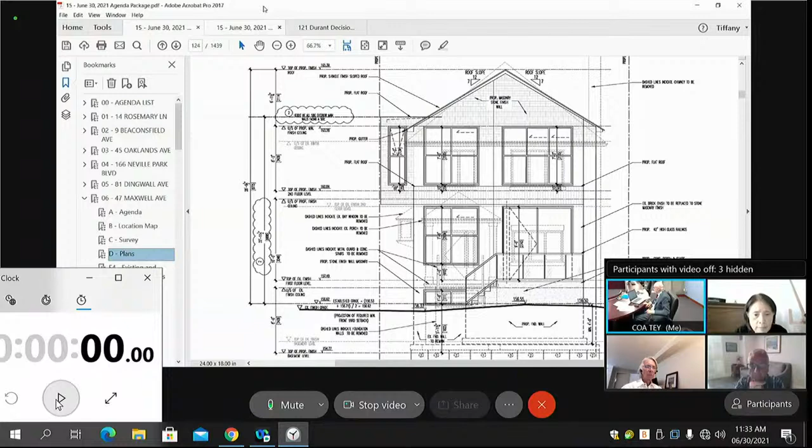Hello, Mr. Sigil, are you still here? Existing, sorry, I thought that was going to stop. The existing is about 50%, 48, 45. Yeah, it's slightly below the allowed, correct? Okay, 55.55%. Okay, thank you.

All right, any comments? We have a motion. Peter, are we into committee now? Yes. Okay, thank you, I'll start with a few comments. I think this is a difficult application.

Maybe starting with city planning's comments on the parking. I actually think the existing situation for parking is preferable to what city planning is recommending. There's already quite nice screening in front of the property with a hedge and a tree, and I think if that arrangement was changed, it would result in difficulty getting to the same level of landscaping, even though the landscaping is lacking, as well as probably losing another street parking space. So it's not ideal in its current form, but given that it's an existing condition, I think that's better than the alternative, particularly in putting the mature tree at risk.

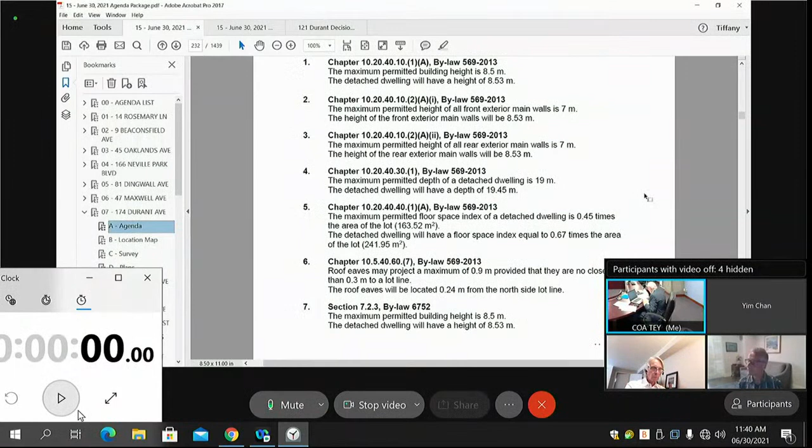Number 7, 174 Durant Avenue. The purpose of this application is to construct a two and a half story dwelling with integral garage and rear ground floor deck. We have before us material submitted by the applicant, a staff report from Urban Forestry. Mr. Mastrandria.

We can't hear. Hello. Mr. Mastrandria, is that you? Yes, yeah. Okay, all right. Please speak up, we couldn't hear you. Yes, I'm here. Okay, so could you give us your name and your address and a brief presentation?

Yes, hi, my name is Leo Mastandre. I'm the agent for the owners at 121 Durant. Well, just a minute, Mr. Mastrandrea, we're dealing with 174 Durant Avenue right now. No, I'm not 174, I'm 121. Well, you're listed here at 174. That's why it was strange, because I was number 10 on the agenda, but you called my name, so I just answered. Yeah, no, you are number 10, but I think they made a mistake on who the agent is, because 174 Durant is item 7, and the agent should be Kelly Palter.

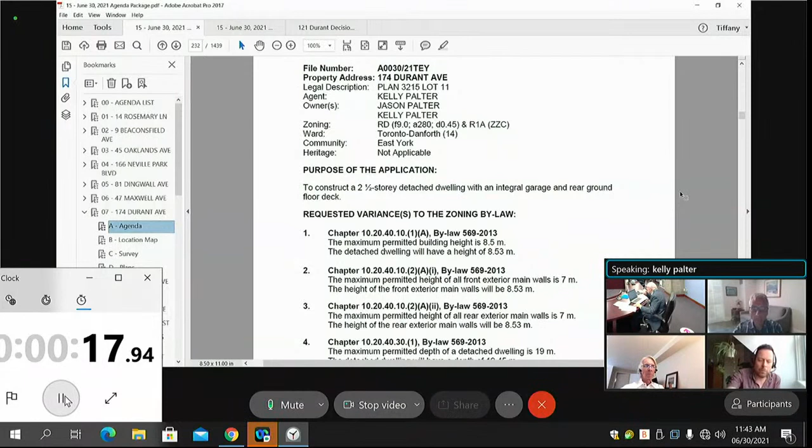So we have lived in this home for 11 years, and it's a bungalow. It's kind of gotten to a pretty bad state, but we have 4 kids, and we'd like to build this house to suit the needs of our family. The variances that we have are on the minor side, and as it was written in the report, what we're requesting really is, again, on the minor side. So we're hoping that you would consider approving it. I don't believe there are any neighbors here that are objecting to it. I do have signatures of support, but unfortunately I submitted them late. But I did speak to all of the direct neighbors, and I don't believe there's any objections.

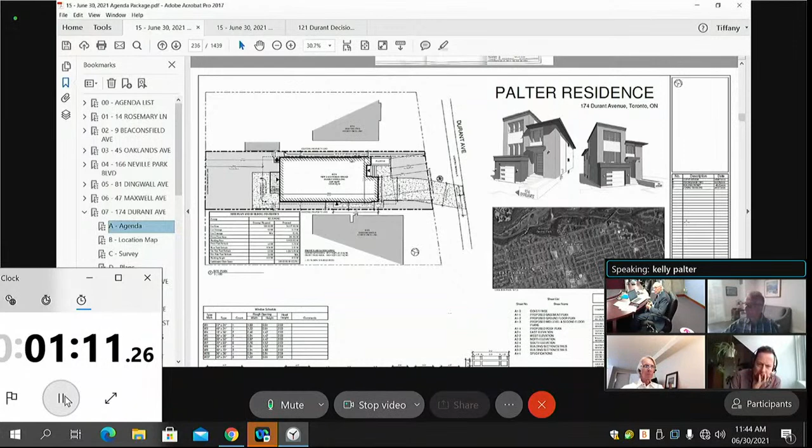Six signatures of support. There are homes on the street that are similar to this design, such as 181 Durant across the street, which is very similar. We have a new build as well at 182 Durant that has a sort of modern look. We tried to go with this transitional modern and more traditional look, but that's my story.

All right, so Ms. Palter, let me go to the panel. I think we've heard enough, and the application is fairly straightforward and appears to be minor. Panel, do you have any questions of Ms. Palter? Yes, Carl?

Ms. Palter, I note that the highest part of the building is over the garage, and I can't for the life of me figure out your floor plans. Could you walk me through? It's that rectilinear block that has me a little bit concerned. There's a garage, and then on top of the garage there's another room, and then on your plans it has a proposed mid-level plan. Is that then on top of the second floor plan? I'm completely lost by the way the drawings are made.

Yeah, so there's a family room above the garage. Okay, that's the mid-level plan, okay. And then above the family room, what's there? Is there another bedroom? Yes, yes. Okay, thank you, it's not really clear from the drawings, but thank you, that's helpful. All right, any further questions, panel?

Okay, let's take it into committee. Any comments, or do we have a motion?

I'd like to put forward a motion. I believe the variances are minor in nature, so I move approval subject to urban forestry condition 1. Yim, you seconded? All in favor? You're all in, you have your approval, sir, thank you.

Number 8, 234 Ashdale Avenue. Purpose of this application is to construct a new 2-story detached dwelling with a rear basement walkout, a rear ground floor deck, and a front porch. A storage shed will be constructed in the rear yard.

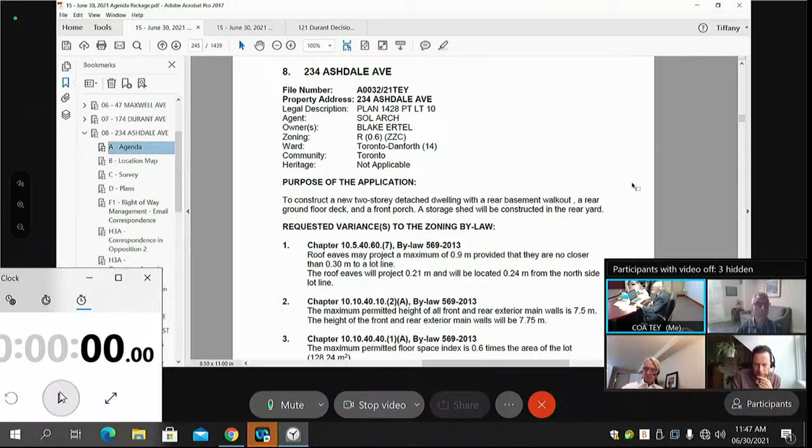Could you take us through this briefly? Yes, this was an application before you in November 2020. That application proposed parking in the front yard, which required a variance as well as a curb cut. At the hearing, I went through my presentation. I spoke with the neighbor to the north about some waterproofing issues. We resolved those issues, but the committee was not able to render a positive decision, essentially based upon the proposed parking in the front yard that required a curb cut.

So the proposal before you today essentially mirrors that proposal, but there is now no parking provided on the site at all. This is a compact urban area on Ashdale where lots are small in terms of frontage. The variance relating to depth is basically a result of the dwelling being pushed in line with the dwelling to the south, so the averaging is what's taken into depth.

In addition, the letter of objection from one of the neighbors deals with the parking and curb cut — there is no curb cut proposed here. As you can see from the variance, there is no parking going to be provided on the site. And as mentioned, parking and transportation has no concerns. I'm happy to answer any questions. This is really our third kick at the can — the last option of parking, where we could propose either a garage, a front pad, or now no parking, which is really the last of the options available to us.

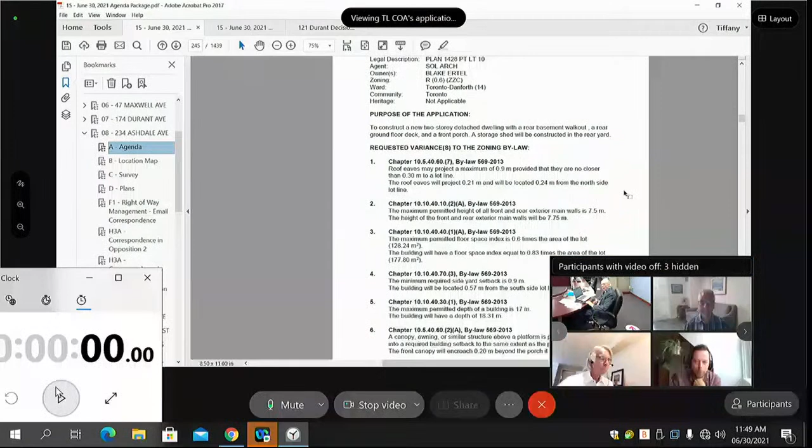So Mr. Benskowski, I didn't ask you to give us your address at the outset, so perhaps you can give us your address for the record. 301 Keewatin Avenue. Okay, thank you. Panel, any questions of this witness? All right, let's move on to Ms. Wong or Mr. Hosker.

Hi, I'm interested — the owner just said the water issues were resolved, but our water issues have not been resolved. I'm not sure if we talked to you previously, but we had water issues because your pipe was leaking. Please address the panel and not your neighbor. Okay, sorry. He will respond if you raise an issue that needs a response. That is when I'm just finding my document.

So we want to know what your concerns are. We take issue with the narrowed space between the new build and our house, and the size of the proposed new construction. Could you point us to the variances you're concerned about? I don't have that record, sorry. It's the variance that has to do with taking up more than 60% of the lot. Yep, 0.83 times the area of the lot. That's variance number 3. Yes, thank you.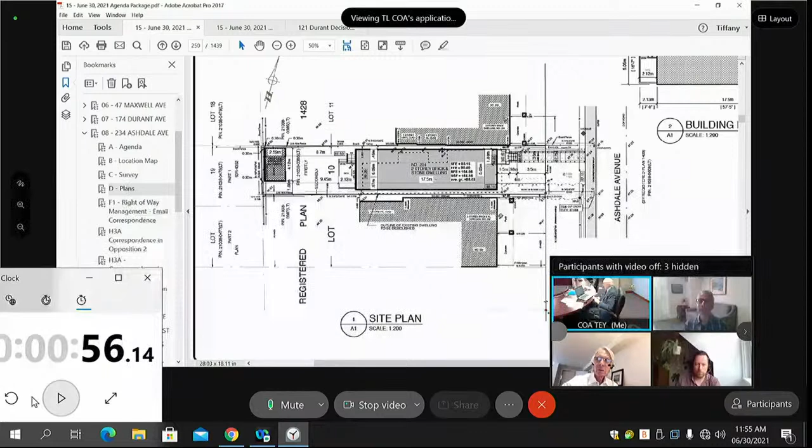Panel, do you have any questions of this witness? All right, we're going to take it into committee now. Any comments or a motion? Do we have a motion? Mr. Chairman, I wanted to ask one question of the applicant, if I might. Yes.

The appellant indicated that there are no eaves troughs on the current building, or no rainwater leaders, and that was of concern to her. I am assuming, and perhaps the applicant could explain, that the drainage for this flat roof building is through a drainage system within the house. There's a drain system that takes care of the water through the house. Is that correct? Correct. So the proposed new dwelling will be able to entirely retain all of the rainwater within the site, as per a grading plan that would be issued if this is approved. Thank you.

Okay. So, yes, Yim, do you have a question? No, I don't have any more question. I have a motion though. Okay, I just wait for other comments. All right, no other comments.

Go ahead, Yim. Yes, I'd like to move for approval. The reason is that I think the applicant has made a very strong attempt to make this work since the last application. Looking at the revisions they've done, and what's in front of us, I think the variances are minor. I do not think there are any conditions needed, and I would like to bring a motion for approval.

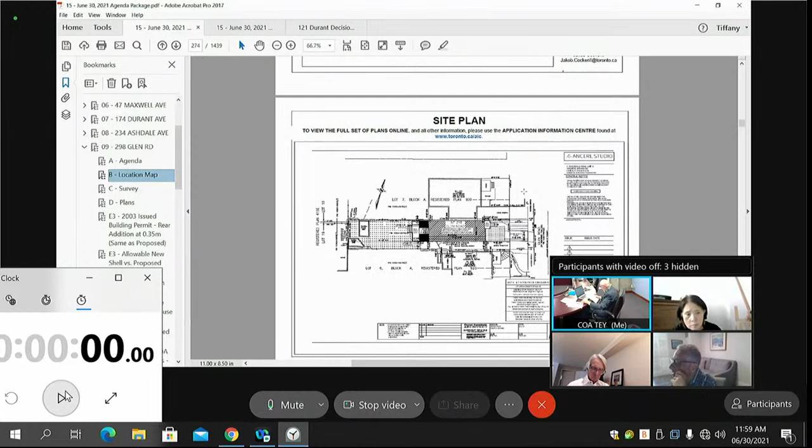Okay. So you better give us a presentation. There's lots of opposition. Okay, all right, so thank you for hearing me.

We have worked on this application in a manner we feel is least intrusive to the community. While we are asking for 7 variances, we are hopeful the committee will see our efforts and agree that these are minor. 6 of these, except FSI, are circumstances of the existing restraints of the site.

Would you please tell us which ones they are? First, I'd like to speak on number 2 and number 7, both related to parking. There's a letter in your file from transportation who are not concerned. These 2 variances we believe are a technicality of zoning, as one parking spot is existing and licensed to the property owner, long-standing, and will remain. Transportation notes in their email that we are maintaining the spot currently licensed to the owner.

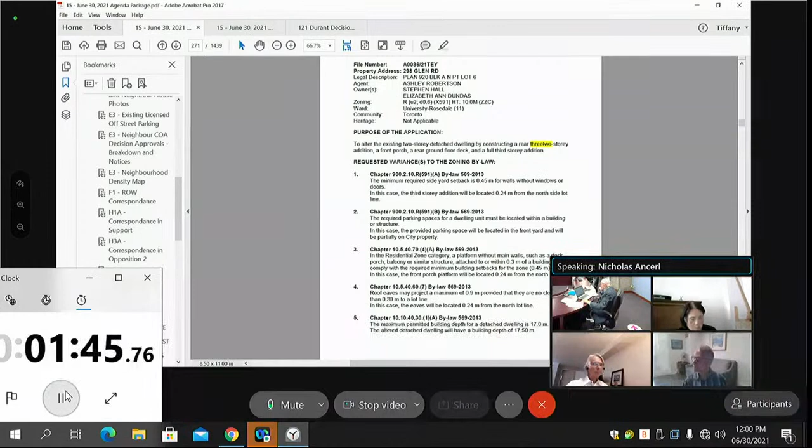Secondly, numbers 1, 3, and 4 are all related to the side yard setback. We'd like to point out that this side yard setback of 0.24 is the setback of the existing home. We considered the Rosedale community, which is largely heritage protected. While this home is not heritage, the decision to renovate rather than build new was in part to keep the existing character of the streetscape by keeping the home in its existing location, an important heritage consideration. We'd consider number 3, the front porch, and number 4, the eaves troughs, along with number 1, the setback, all as a circumstance of the existing placement of the house, which we'd like to build in line with the existing.

I'd like to point out that the front porch and eaves troughs will encroach less into the setback with the proposed design than what currently exists. The side yard setback for the existing conditions is also common to be approved by the Committee of Adjustment. Most notably, submitted in our file under neighbor C of A decisions: number 2 Jean Street, right around the corner, has been approved for the existing condition of 0.06, and a few doors north on the other side of the street, 325 Glen has recently been approved for basically a 0 setback for the existing situation.

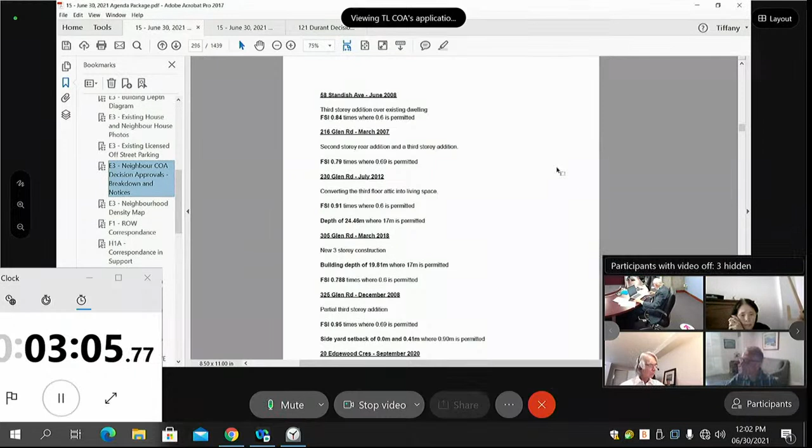Number 5, building depth: 17 meters is allowed, and we have proposed 17.5 meters. If you look at the diagram labeled building depth, our building length is 16.97 meters, which is shorter than what is allowed — should we have moved the house forward to the required front setback of 0.5 meters ahead. The reason for this variance, as mentioned earlier, is that we are choosing to work with the existing conditions and keep the home in its historic position.

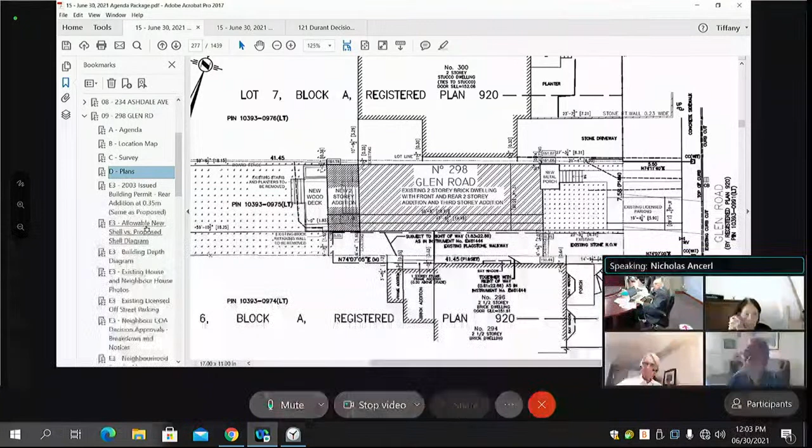Number 6 is floor space index. We are requesting 85%, which we believe is a humble ask in Rosedale for a 2,880 square foot house for a family of 5. If you refer to the density diagram, we are not setting precedents. Several homes in the area have been approved. The green shows existing homes in the area reaching up to 119% FSI, and in red we're showing Committee of Adjustment approvals for additions or new builds up to 95%.

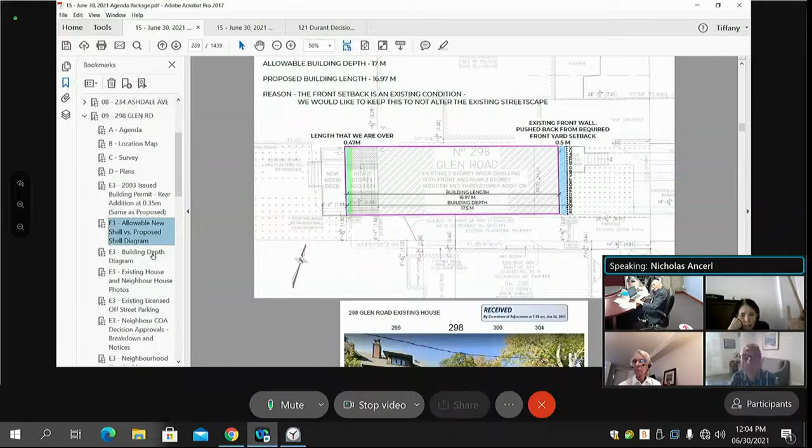We also have a diagram referenced as shell, showing the elevations of the front and side. We feel this is important for the Committee of Adjustment and our neighbors to understand the effort made in respecting the variances. If we were to build new, disregard heritage aspects, and work from the max allowances, our frontage shown on this lot would be larger — we are proposing a smaller frontage than what is allowed, shown in red. Note we also have an area scratched out in blue to the side, relating to the side yard on this property.

Yes, right there. Thank you. So you also see the one sketched with the blue there.

For a lot this size, if there was no easement on the side in this community, that would actually be the allowable size of the house. So what we're proposing is significantly smaller. When you look at the side yard setback, it shows we're also shorter than what is permitted, and within the height. The point is we are building within a zoning-compliant shell in which we are asking for extra floor space without asking for a larger footprint. And the variances are a result of the current historic placement of the home.

So I think that the... So would you please speak up? I can't hear you. Yes, I'm having trouble hearing you. I'm questioning the map, the site plan.

In the backyard, there's a depiction of two structures, which are squared off with none of the dots inside. And I can look out my back window and see that there is only one structure there, and it's in the southwest corner, and it is rectangular.

Sir, those are sheds, but can you tell the committee what your concerns are with the proposal? That's what they want to hear from you right now. How will it affect you? What are your feelings about what they're proposing to do?

Well, it seems to me that there's a mixture of housing sizes on this block, and that's appropriate for people with different incomes. And turning it into a block that's just exclusively for large houses, wealthier people, I do object to that. It's been a neighborhood with mixed resources, and I value that aspect of the neighborhood.

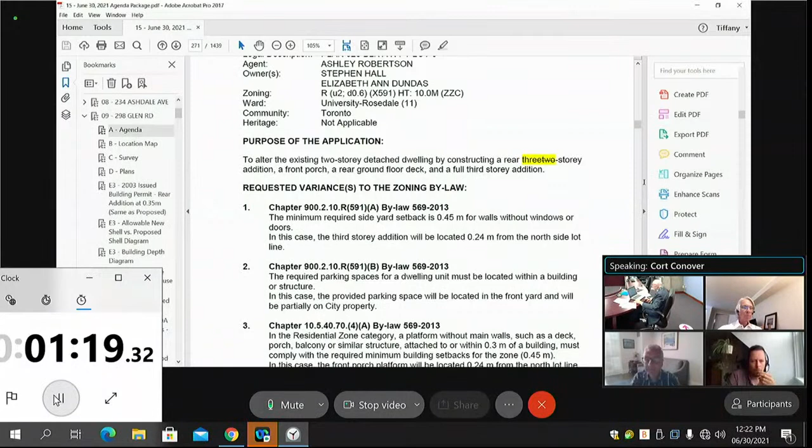Yes. Okay, good. My major concern is the 3 or 2-story addition. I have a pool in the backyard. The house is already set further back than almost every other house in the neighborhood, and I'm in the backyard constantly, in the pool, and it's just going too far back, and I feel I've lost the privacy. It's also not fitting into the neighborhood — this is a McMansion, and that's not the style of the street. If you want to build a 3rd floor I got no problem with that, but moving back and imposing your building further on other people is more than I can accept.

Okay. Are those your comments, sir? They are, yep. Panel, any questions? Okay, thank you sir.

Varun Raj. Through you, Mr. Chair, attempts were made to contact Varun Raj, but we're unable to reach him. Okay, well, we'll move on. Gabriel Brody.

Hello, can you hear me? Yes, we can. Okay, thank you, I appreciate being heard. I'm at 327 Glen, it's Gabriel Brody. I also have very big concerns about the scope of the 3-story building with the size of it compared to the rest of the buildings. But probably the biggest concern, and I'm sure it is for most of the people on the street, is we have a very

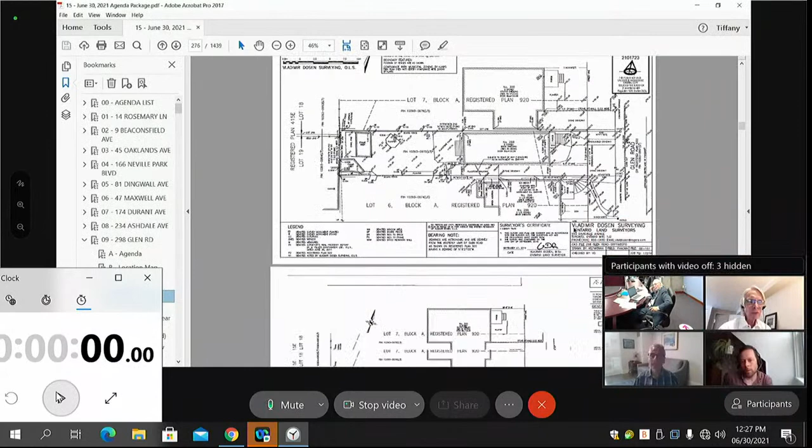On the site plan, there is a parking space that is partially on the applicant's property and partially on the street, and we've discussed that, and it's not considered a legal parking space, but the proposal is to retain that space. I believe that's correct. Then there's a right-of-way, and the right-of-way appears to go all the way back to the back property line, and the owner at 296 has a garage. So my question is, is the garage used?

Is the right-of-way used? Because one of the other people questioned this shed in the backyard, and the shed appears to block access to the garage. And then lastly, does 296 have a garage parking space, and or do they have front yard parking? I'm not at all clear on what's provided at the present time, and therefore I don't understand the problem.

All right, so should we go back to Mr. Bulger to see if he can help us? If you're still on the line? Yes, I'm here, still on the line. Okay, thank you.

So the confusion is that, yes, there is a right-of-way between the houses, between 298 and 296, that extends to the backyards of both. And in the backyard of 298 are sheds, and in the backyard of 296 is a swimming pool. And so that's the use of the right-of-way, is to get to the rear of both houses.

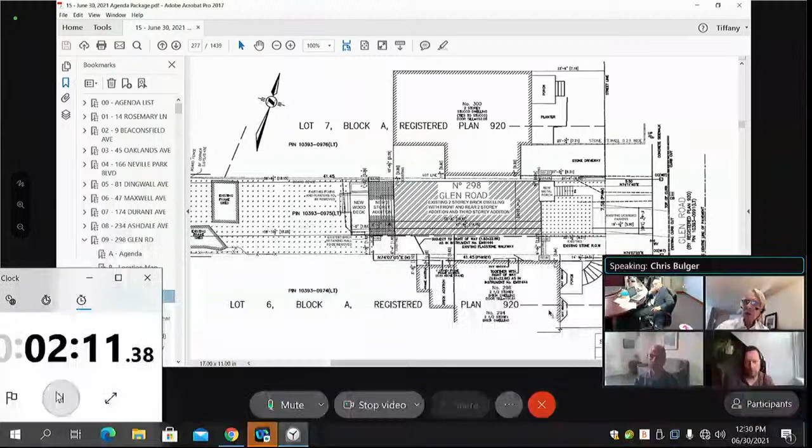You can see all that square spot with all the dots, that's paving right now. The cars can park pretty close to the house, right? So there's enough room for two cars. They're not huge ones in front of 298, and there's enough room for two cars in the right of way. That's been the historical thing for years.

And if there was a challenge with 298, then what they would do is double park on the street, blocking their driveway, right? So they had one car in and one car blocking, so they could move whenever they wanted. That's the way the parking was accommodated over the last 20 years. Thank you very much. All right, thank you, sir.

Gordon Parker. Hi, Mr. Parker. Hello? You're unmuted. Yes, Mr. Parker? Yes, can you hear me okay? Yes, we can. Okay, thanks very much for including me in the hearing.

I own 319 Glen Road, just up the street from the subject property. My concerns generally relate to the variance for site coverage and the height of the property. The front elevation also is not really in keeping with anything else on the street, and would appear to be of a design that doesn't follow any of the guidelines established by a lot of the community groups in North Rosedale. So generally, I'm against the granting of the variance on those fairly straightforward grounds.

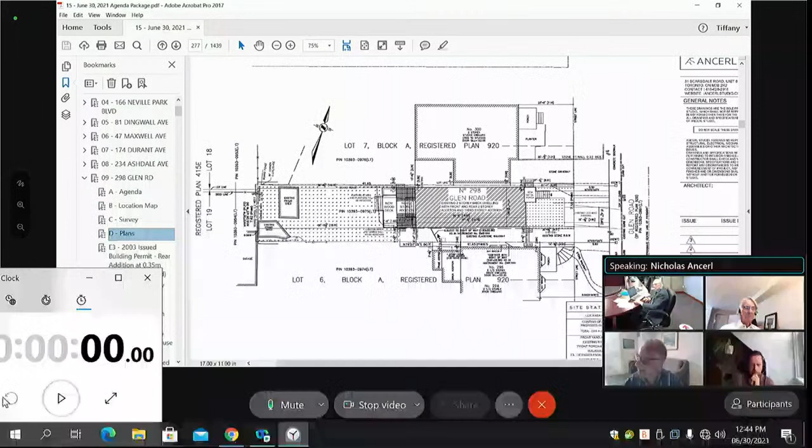Yes sir, that actually was a typo on the 2-story addition, because there's actually 1 story there. So the roof slopes back there, but in all the other plans it shows how it is 3-story. That was just a typo. Okay, so in the paperwork that becomes 3 stories. Right, so that new 2-story addition really is a 3-story addition. So my question really is then,

what are the impacts of extending that 3-story that far back to neighbors to the north and south?

So as mentioned, we don't feel this is a very large impact. If you look at a 2-story addition within the guidelines, we would actually be allowed to move the house back slightly if we were doing 2 stories. On the 3rd floor we chose to slope the roof, as many condos in the city step back, and so on. But we chose to slope back the roof also to not get a height variance.

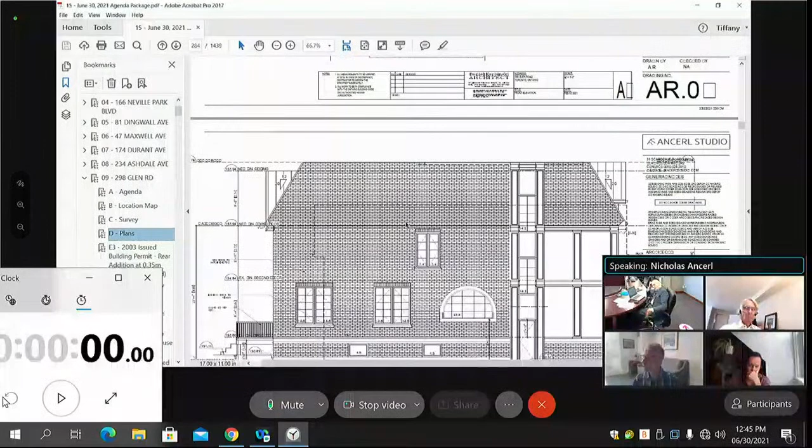So the impact, as mentioned, from the way the sun travels, I don't believe there'll be any impact on the neighbor at 296. It's too far away from the neighbors backing onto the rear to have any effect. And to the neighbors at number 300, as I mentioned earlier, we did an in-house shadow study, but the way the sun travels, only in January will there be much impact with this sloped roof, and it's really more on their rooftop deck on the side, where they have the air conditioner, and we don't imagine anybody sitting out there in January.

So we don't look at this as being much of an impact, and it's not that much more of a... I'll leave it at that. Thank you.

Mr. Ancerl, I think at least one objector talked about the building not being consistent with the character of the street. When I did a street view, I saw some other houses with quite a bit of glass, etc. So I wondered, is this a transition house, or is it consistent with the character of the houses on the street? Well, in my opinion, if you look at the pictures we've installed in the streetscape diagram, the street's already had many different houses altered over time.